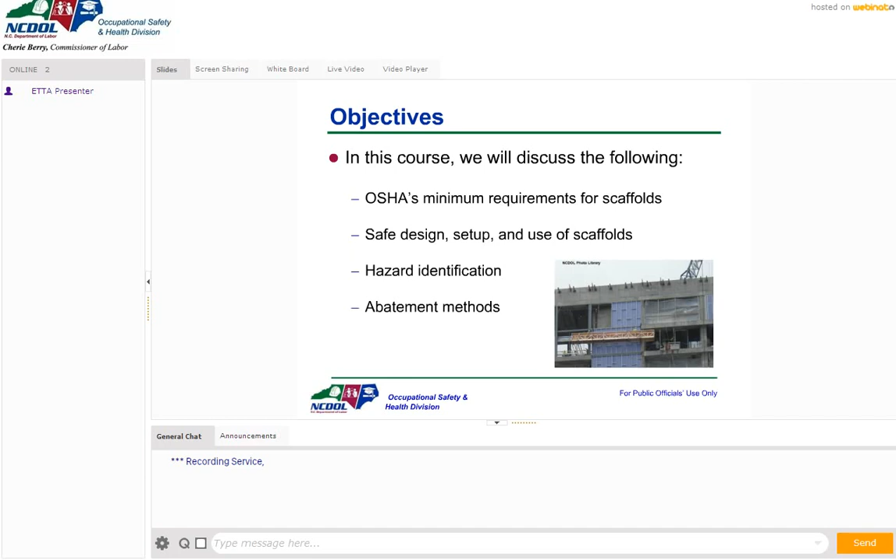But for those of you who can see that little picture in there, a little photo, what type of scaffold is that? What type of scaffold is that on the side of that building? All right, Wesley, that's a suspended scaffold. So again, we're going to be talking about it. Jim, you're all correct. Anybody that typed in suspended, you're exactly right.

Now, again, as we go through the standards, we're going to talk about the scope, general requirements and additional requirements, aerial lifts, and training requirements. And there are a lot of appendixes to scaffolds. These are all non-mandatory, but they got good information about specs, safe access and protection of erectors and dismantlers.

National standards, training topics, drawings, and like I said, all those are non-mandatory appendices. Now, what OSHA standard did scaffolds just come out of? What did scaffolds come out of? What OSHA standard? Think walking working surfaces. What standard book is that in? No, we're not talking about subpart K. What standard book? If you have a standards book, okay, those are all good answers.

If you have a book, an OSHA standards book, what standards book did the scaffolds come out of? If you got a new one. Okay, now it's still in construction. That's 1926. So scaffolds are in 1926. What's the other? Yeah, there we go, Jim. 1910, Christina, Mark. Scaffolds, if you're in general industry and you're using scaffolds, say for maintenance, if you have a scaffold set up, scaffolds used to be in the general industry standard. Now, if you're using scaffolds at all, even if you're in general industry work, you're going to be going to the construction standard.

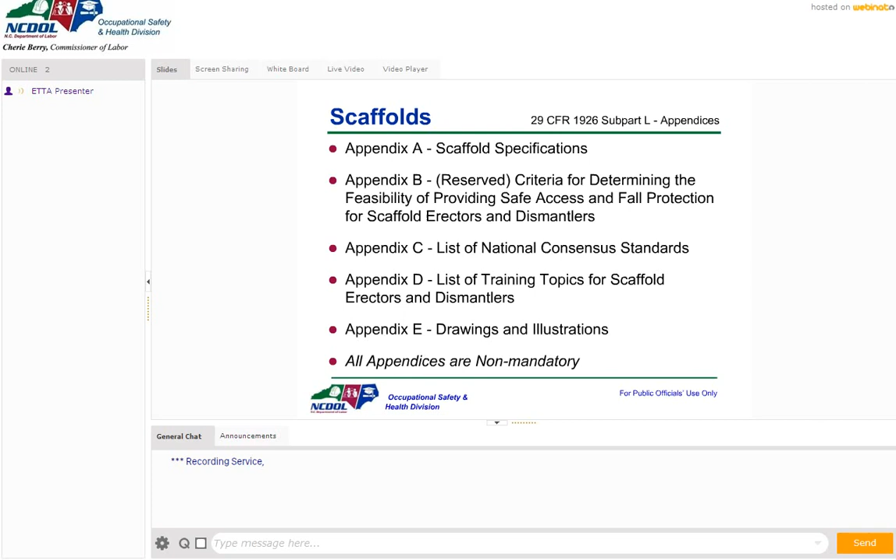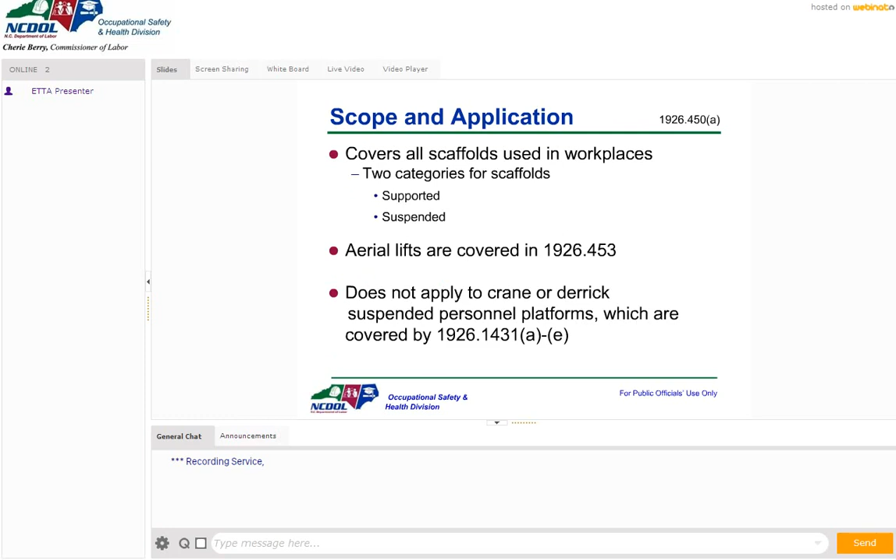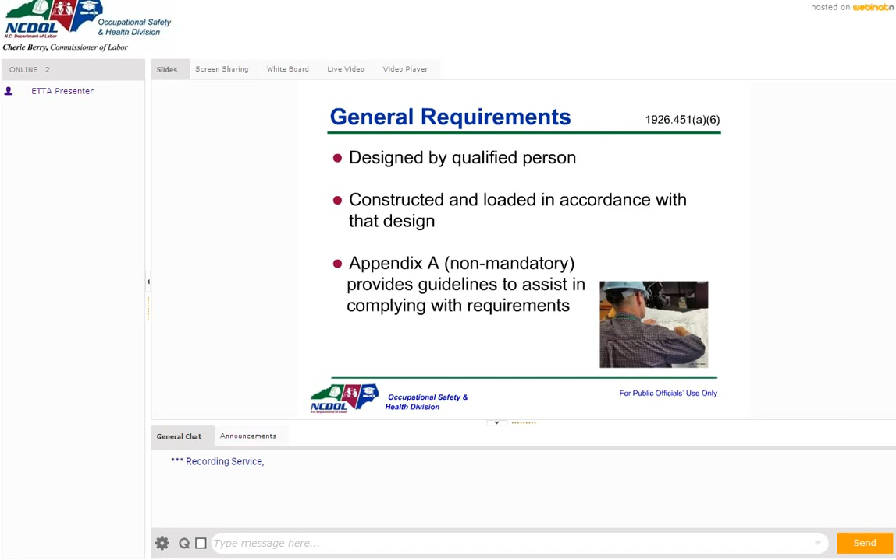Okay, let's keep going. Now we're going to cover all types of scaffolds, including supported, suspended, aerial lifts, but not crane or derrick suspended platforms covered by another standard. Now, the scaffolds need to be designed by a qualified person and loaded by the design. And then, like I said, you can look into the appendix for more information.

Now, what are the major things? If you set up this scaffold here, this is a pretty big scaffold setup. What are the major things you're looking for when you're looking at that scaffold?

So you're looking for major things. Access, okay, is there proper access? Is it anchored to the building if necessary? Is it fully planked? Is it braced?

Now, if you're measuring the scaffold, what might you be measuring? The platforms, okay, the width. The guardrails, overhang, those are all great answers. Toe boards, guardrails. But you want the scaffold to be plumb.

What does plumb mean? P-L-U-M-B, plumb. It needs to be plumb. Now plumb would be like straight up and down. So if you put a level beside it, or a device, you could use your iPhone, whatever, if it's straight up and down, what degree would the reading be? What degree is straight up and down? Straight up would be 90 degrees, or 0 on the level.

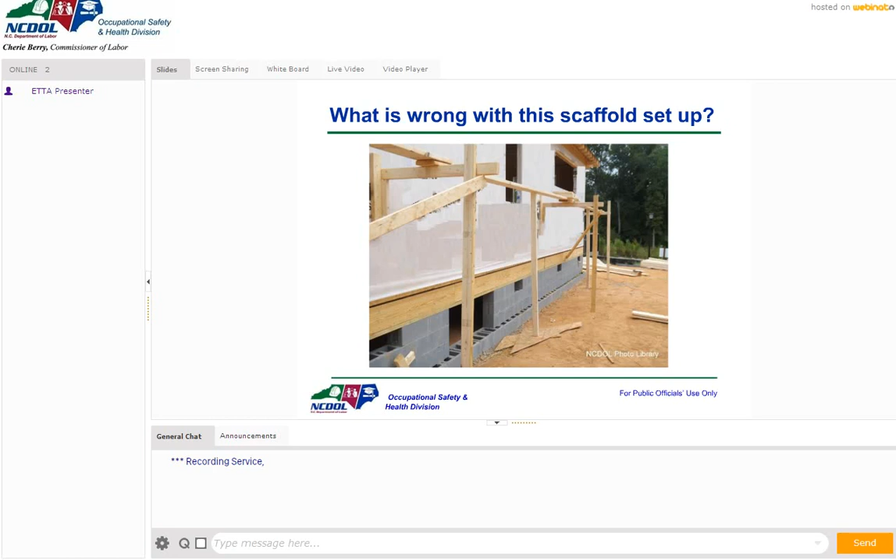Now the scaffold should be supporting at least 4 times the intended load. That's the people, equipment, and supplies.

And now we also see a compliance picture. Like I said, we get a lot of our photos from compliance. What do you see wrong with this? Now it's really hard for you to see because that picture is so small on your screen. Do you see anything wrong? Okay, guardrail, okay, yeah, a lot. That's a great answer, a lot.

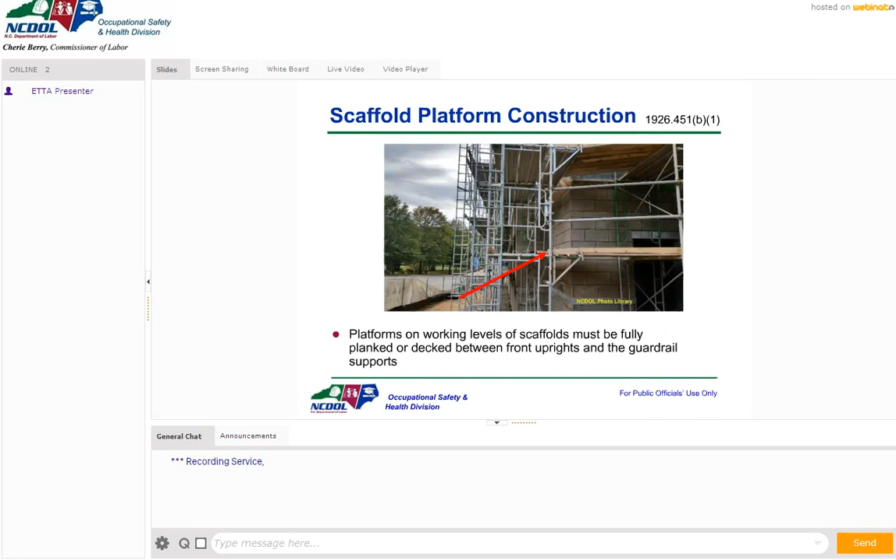So then we get to platform should be fully planked between the uprights. Okay, that's pretty well set. We had a mention here, no hard hat. That is so small, oh yeah, one of those workers may not have a hard hat on. It's really, I'd have to blow that up. But hard hats are required. That's a great comment.

Okay, now we're going to get into a lot of specification slides. Some of those specs I'm going to read to you, this is just straight out of the standard. No more than 1 inch between adjacent units, unless you're trying to fit it around an upright, which you'd have a maximum of 9.5 inches.

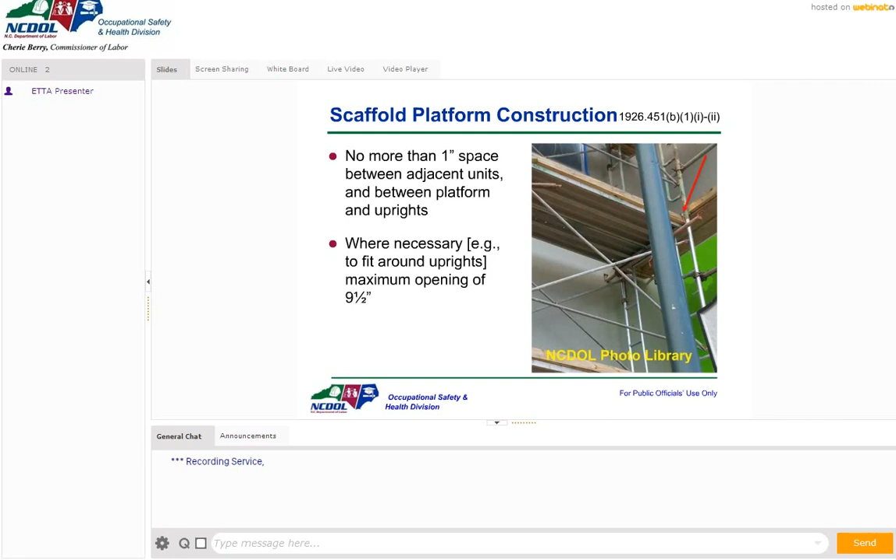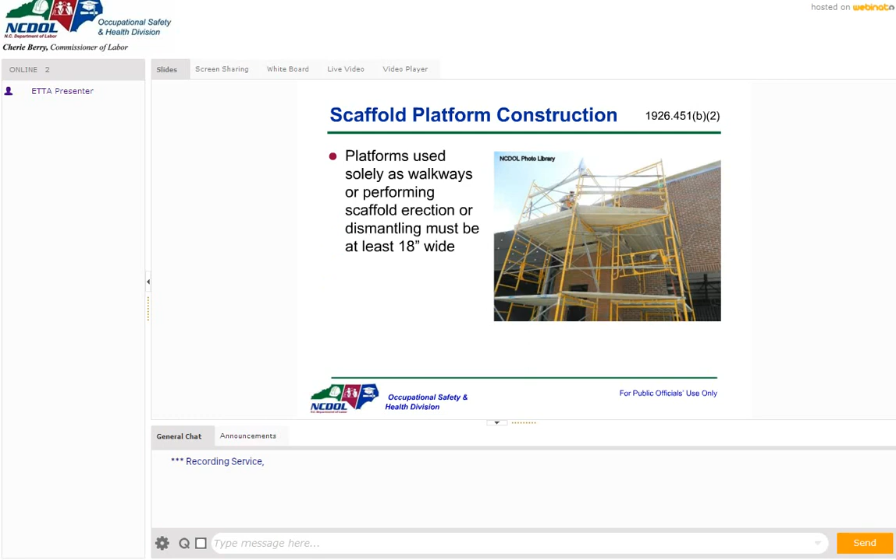Platforms for walking or performing erections should be at least 18 inches wide. And platforms for these devices or types of scaffold should be at least 12 inches wide. We got a ladder jack, top plate bracket, roof bracket, and a pump jack scaffold.

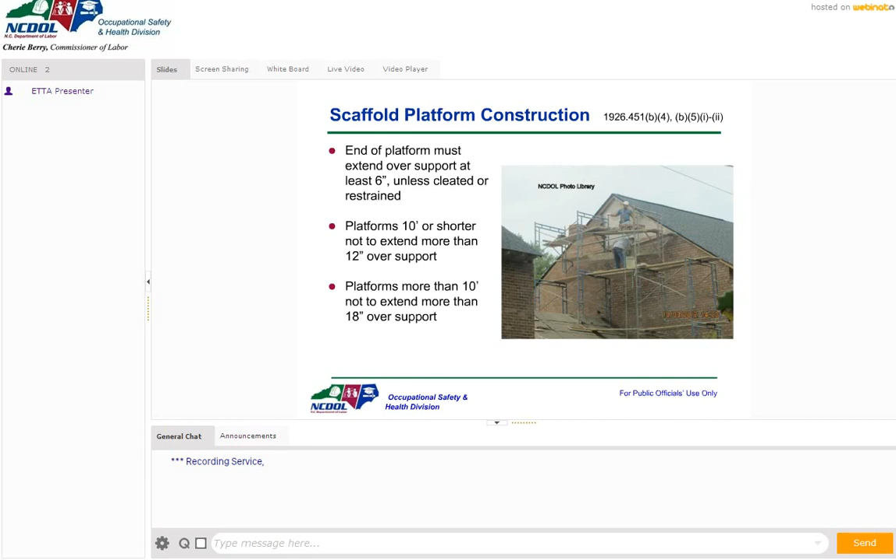This is pretty basic. So the competent person for the site has to do an inspection of that scaffold daily before use, and they're going to be looking at platforms and full planking and all. And each abutted end of a scaffold plank must be on a separate support surface.

So the end of each abutted plank must be on its own surface and not on another scaffold.

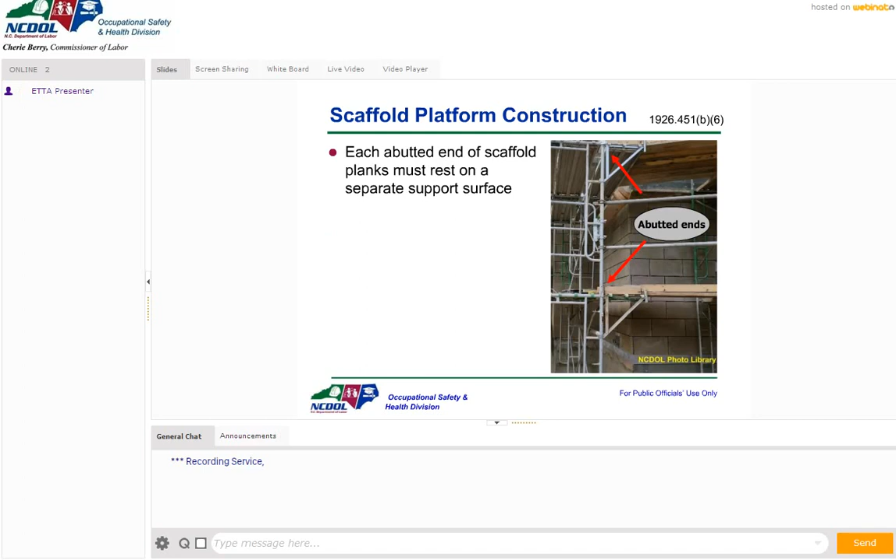A minute ago, I should have mentioned on this other side we have issues as well. So there's several. Now let me get back to where we were.

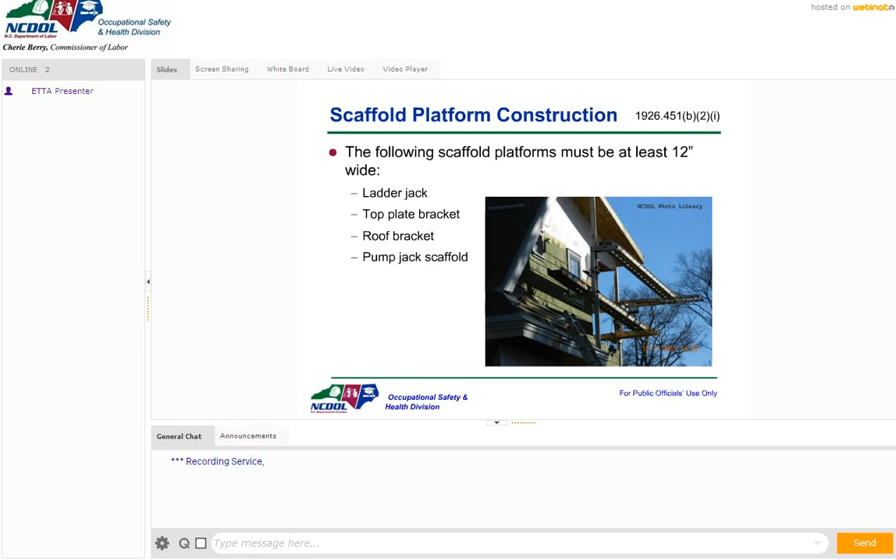Okay, let's keep going. Scaffold components must not be intermixed. Now, what about that picture shows you that those are intermixed components? How can you tell from that picture? Different colors, that's right, colors. So I don't think anybody just decided to take a particular scaffold and take the parts apart and start painting them different colors. These are parts from different scaffolds.

Now, what is that worker doing wrong there? Did we see this all the time? What is the worker doing? He's doing something - climbing the cross brace. Climbing the cross braces are not engineered for that, and that's a serious issue when you see people climbing the cross brace.

Your competent person, when setting up a scaffold, needs to be involved and fully knowledgeable of the proper setup for that scaffold. They're looking at the situation, the weather, everything. If a scaffold is in use, let's say the competent person is on the ground for the job, looking up and seeing this guy climbing. What should the competent person do?

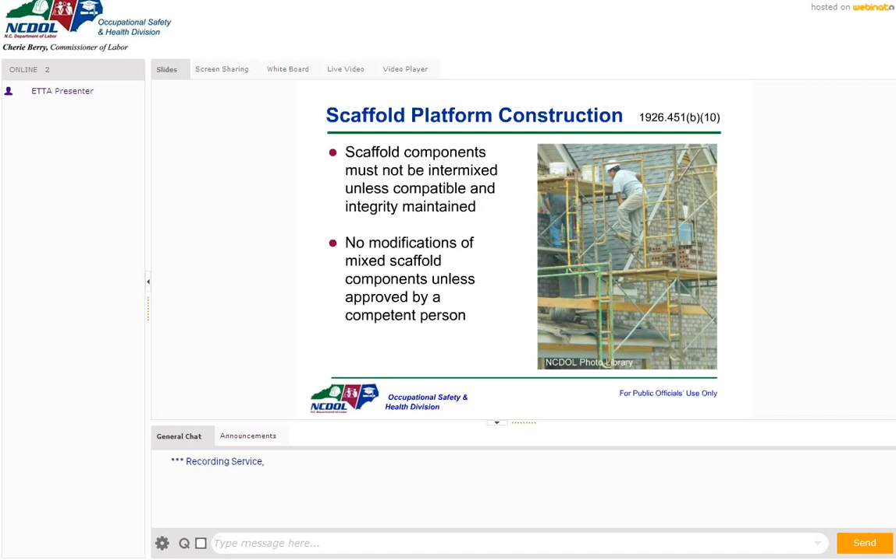If we build these scaffolds taller and taller, we have to start essentially tying them off to the structure—guying, tying, bracing, or equivalent. It says 4-to-1. So what is that? You're saying 4 times something to determine where you need that first tie off. So if the base of the scaffold is, let's say, 5 feet by 8 feet...

What would the tie-off point be? What height? Let's say 8 by 5 at the bottom. Still not seeing the answer—it's 4 times the minimum dimension of the base. 20 feet, Michael, that's right. 20 feet is your first tie off. Your base of your scaffold is 5 feet by 8 feet, so 5 feet is the smaller dimension. 4 times 5 is 20.

So if a compliance officer or an inspector came in, they would say you have to have a tie off at 20 feet. Federal OSHA has a quick card on supported scaffold inspection tips that talks about tie-offs. You can go to Federal OSHA and print out a handout on that as well. Okay, let's go to the next slide.

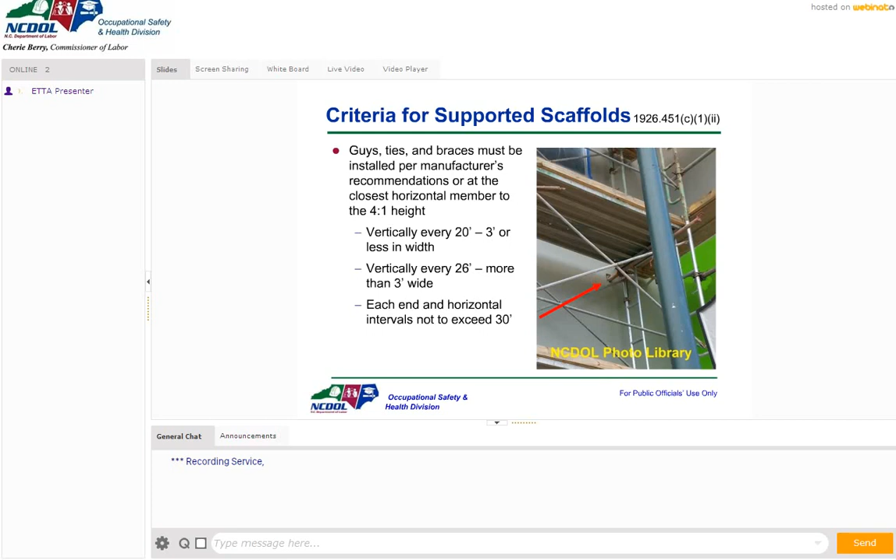We must install everything by manufacturer specs, and I am not going to read that slide to you. There's a connection here, as you can see. Poles, legs, frames, uprights must bear on base plates and mud sills to give a firm foundation. And the second bullet says, if you're on a concrete slab, you don't need a mud sill.

Now, what is a mud sill? You can look at the picture and see a mud sill. What is a mud sill? I know somebody on here knows—we got some experts online. What is a mud sill?

That support base, okay. There are pieces of wood under the base plate of the scaffold, the base plate. That base plate needs to be on a mud sill. Now that could be a section of a board like those, or it could be a long board, but it's a mud sill to keep, like Jim says, the whole scaffold from sinking into the ground. Now, if you're on concrete, that's not going to happen, so your base plate can be just right there on top of the concrete.

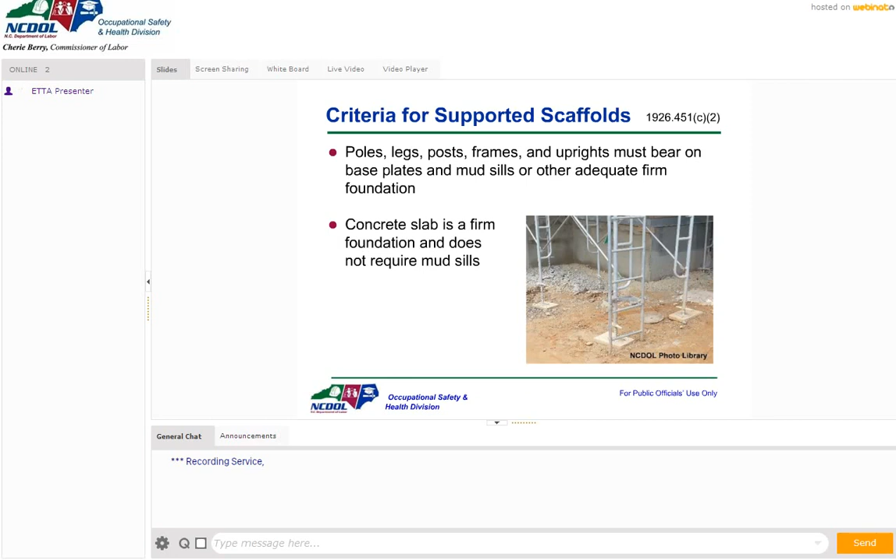Here's a really good close-up showing the mud sill. So right here, you've got the mud sill, and you got the base plate here, and a screw jack here to help level the scaffold, and here's an access ladder going up. So this is what we expect to see.

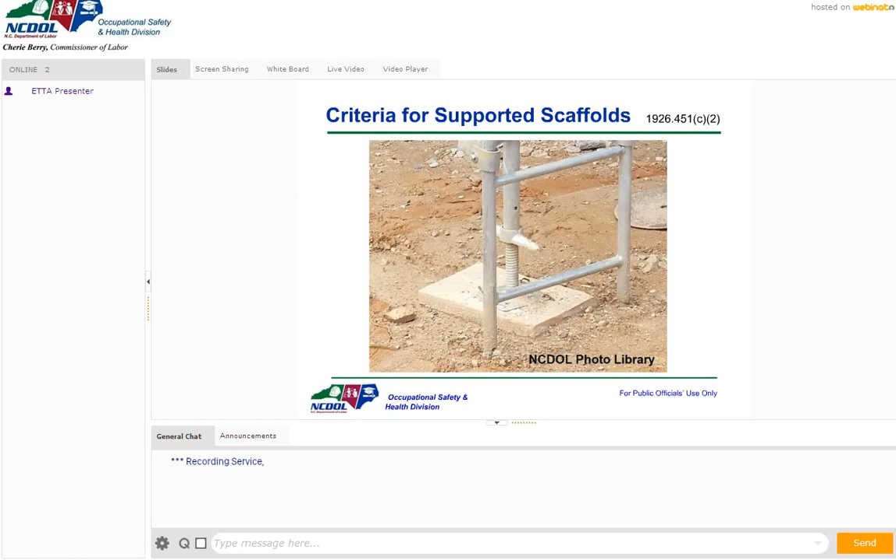Now we also see stuff like this—unstable objects. We've got a real problem here. Can you put a base plate on top of a concrete or cinder block? I'll say not concrete, but cinder block. Can you do that? No, you cannot use a concrete block to put a base plate or scaffold on. No way, like Wesley said.

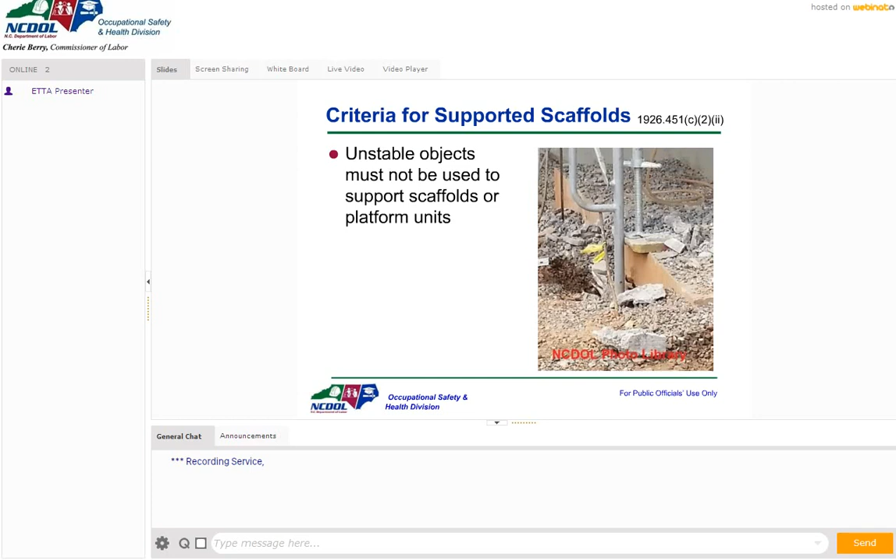Okay, now we're back to that picture. If a compliance officer, OSHA compliance officer comes in, or an insurance company inspector comes in, or a corporate safety auditor comes in, and they see that, what do you think? Now this picture, what do I not see? What do I not see in this picture?

Right, and a lot of other stuff is wrong as well. But a compliance officer has to prove exposure to an employee, that somebody was up there standing on that. They can tell by interviewing employees, and there are different things they can look at to show that somebody was actually up there. They may even ask, how was that even built?

So I wouldn't want to work for a company that does this kind of stuff. That would be really scary to me to know that there are employers out there that are setting up this sort of thing.

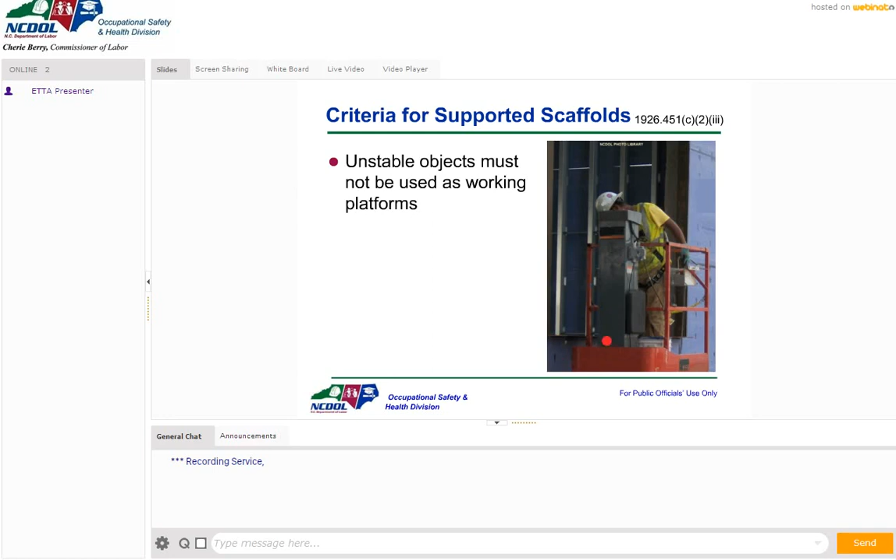Now, unstable objects can't be used as working platforms. So what is that person standing on? You might not be able to tell. Okay, that's a bucket. So you can't take these elevated work platforms and put boxes and buckets and other things up there to give you more height, or ladders. You don't want to put any of that stuff, whether it's stable or not, because when you raise somebody up too high, the guardrails can't even do their job.

Front end loaders must not be used to support platforms unless designed by the manufacturer. If you have a scaffold platform, it has to be properly engineered and designed and attached to the forks. If you have rough terrain forklifts with those platforms, it has to be properly installed.

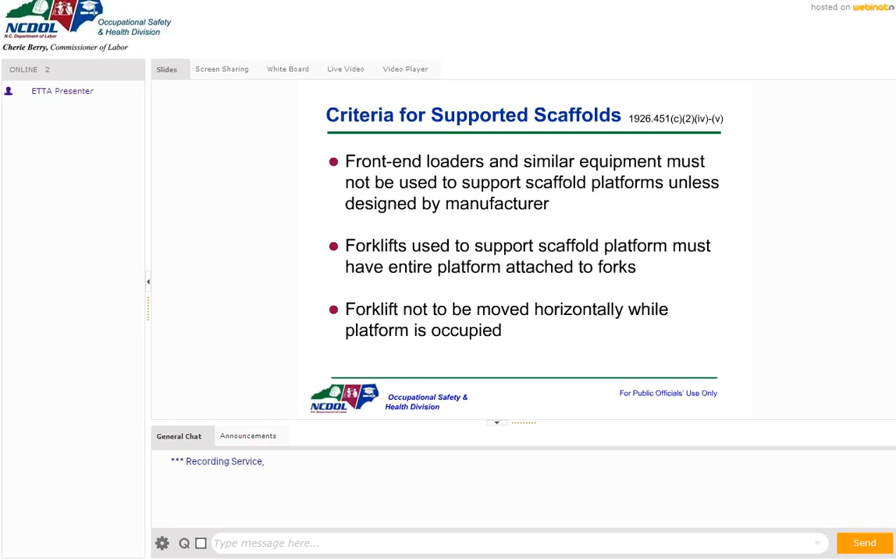So here we go, plumbing and bracing is important. Now here we have suspension scaffolds. If you're working on that suspension scaffold, one of those people up there, do they need fall protection? Do they need a personal fall arrest system? Yes, they do. So you're going to have lifelines. Not just the lines or cables that are suspending the actual scaffold, but lifelines coming down for the workers to attach to, because we see in the news all the time where the wind gets involved with these things, or they have failures, and next thing you know you have a worker dangling by their lifeline, which actually saves their life.

Now, if you follow the news this week, there were two fatalities at Disney World. They're building a hotel down there. They had a supported scaffold. From what I heard on the news, the supported scaffold came down, and I guess they're still investigating it, but two people died. So again, these types of falls are not uncommon anywhere in the United States.

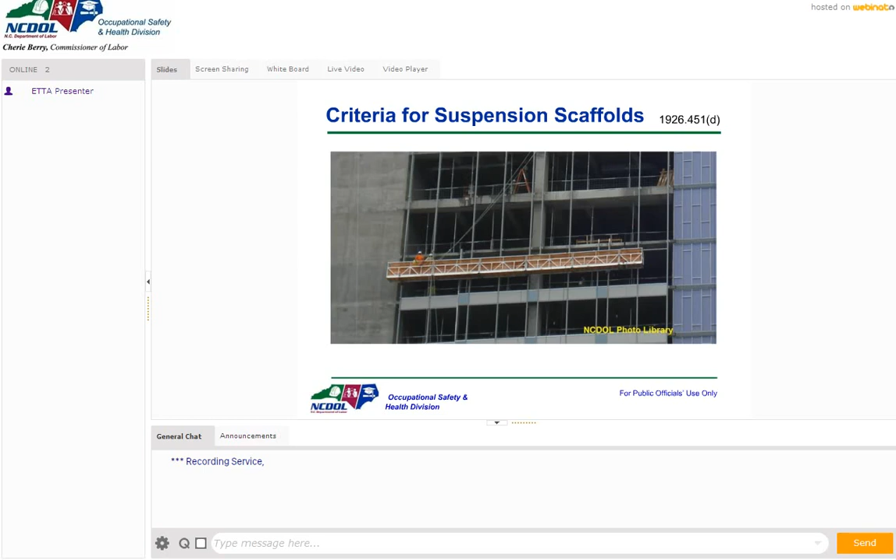Okay, so suspension scaffold support devices must be properly installed and supported. Like I said, there's a lot of engineering involved. Here's the lifeline I'm talking about for this worker that's wearing his personal fall arrest system.

Use proper counterweights. Now, your major companies in the construction business seldom, in my opinion, are you going to see them take a suspended scaffold and just rig it up with stuff that's not approved as part of that system. They're going to assemble and disassemble it properly. So most of the time you're not going to see them using parts that don't go with it, or using other counterweights. Probably not going to see it.

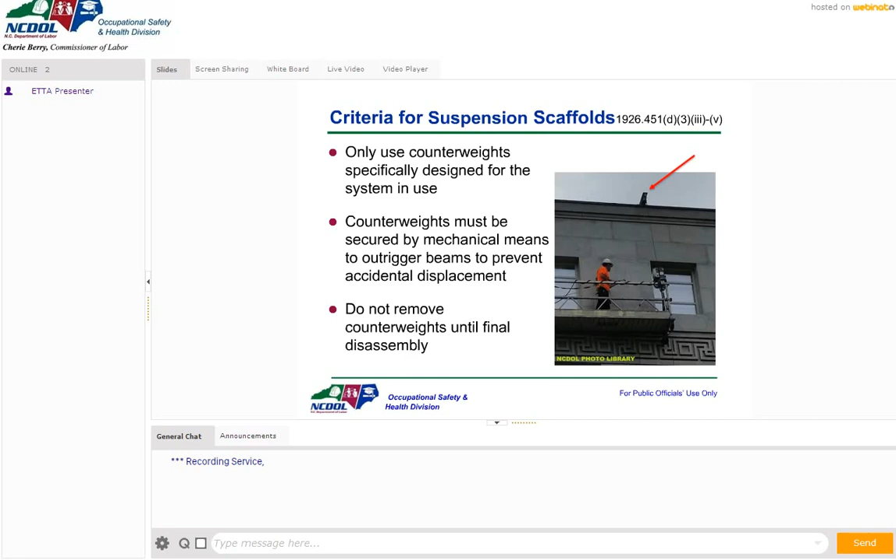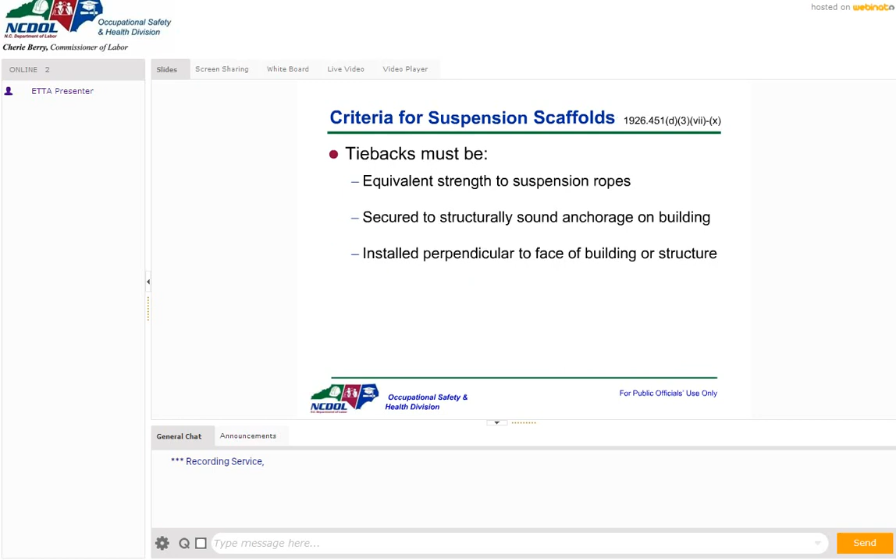Tiebacks, properly engineered and secured and then properly installed. Like I said, I'm not going to read you a bunch of specifications today. But when you have scaffolds set up, the question you're going to ask is, how does somebody get up there?

So you've got ladders that are portable, hook-on, stair towers, attachable stairway type ladders, and prefab scaffold access ladders. Now, there's a big difference between the scaffold frame and the scaffold ladder. So you don't want employees climbing the frame or climbing the cross braces. You want them climbing an actual ladder.

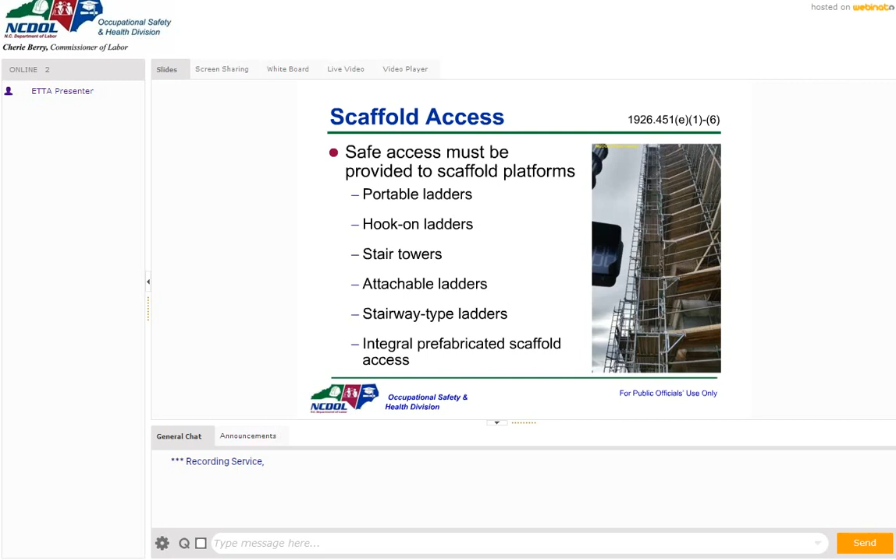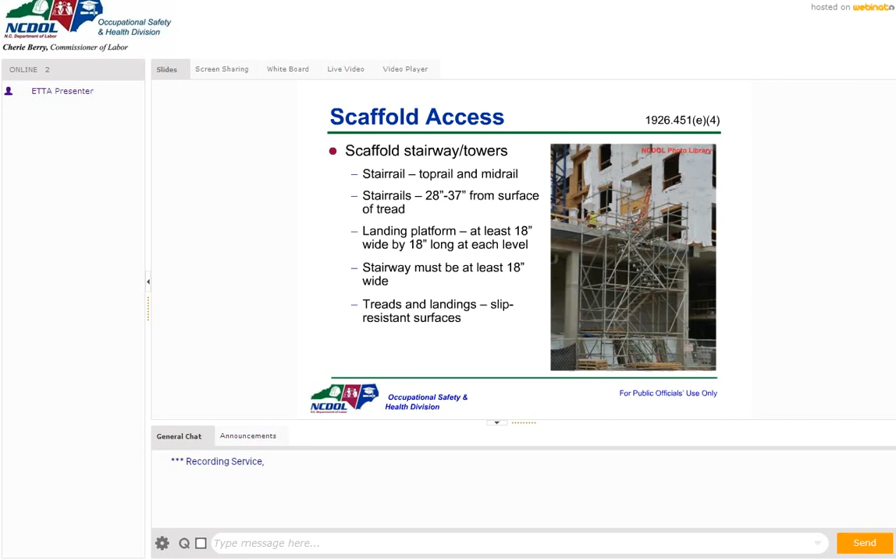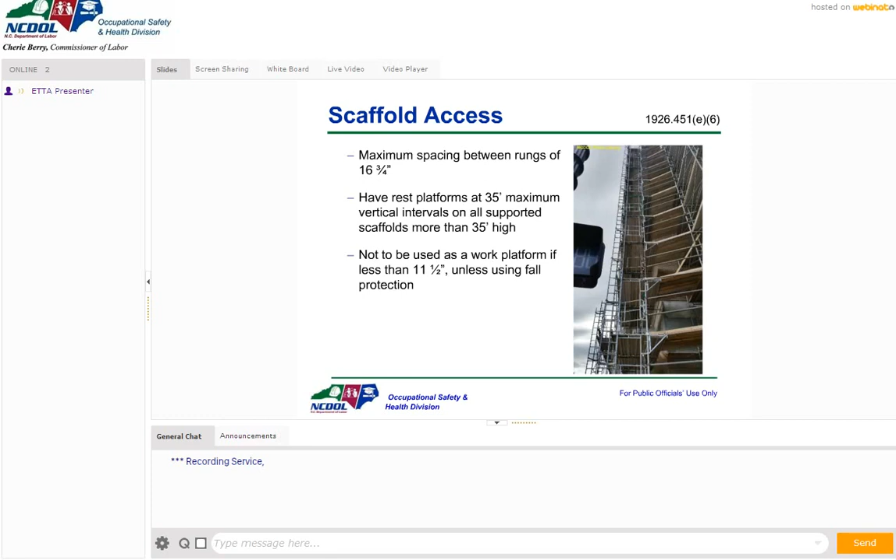Integral access using access frames. If you have built-in ladders or whatever, they need to be built to specification. If you want to read specifications, you can go to the OSHA standard and see what all these specs are. If they're properly installed, you're going to meet all these numbers.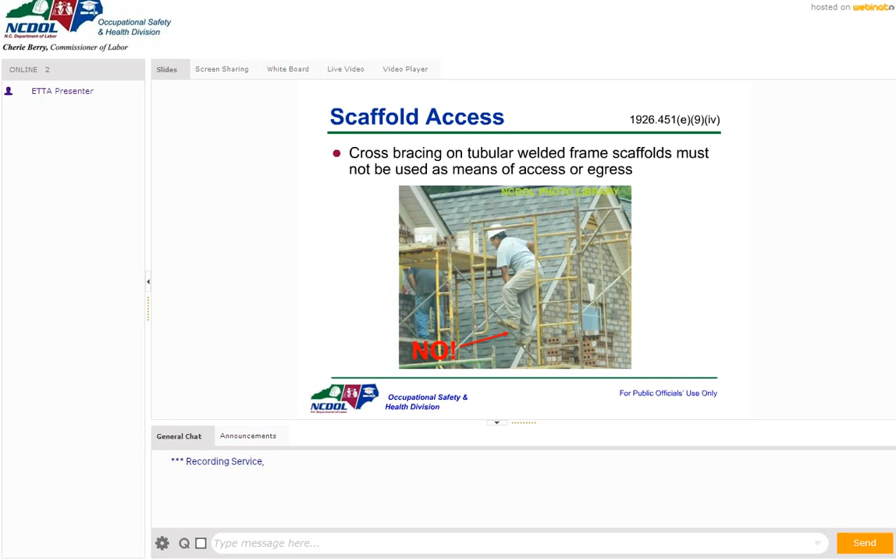So with your company, you're going to tag out scaffolds, ladders, any equipment that doesn't pass inspection. You're going to put a do-not-use tag on it. In many cases, that's going to be a red tag. You're going to tag it out.

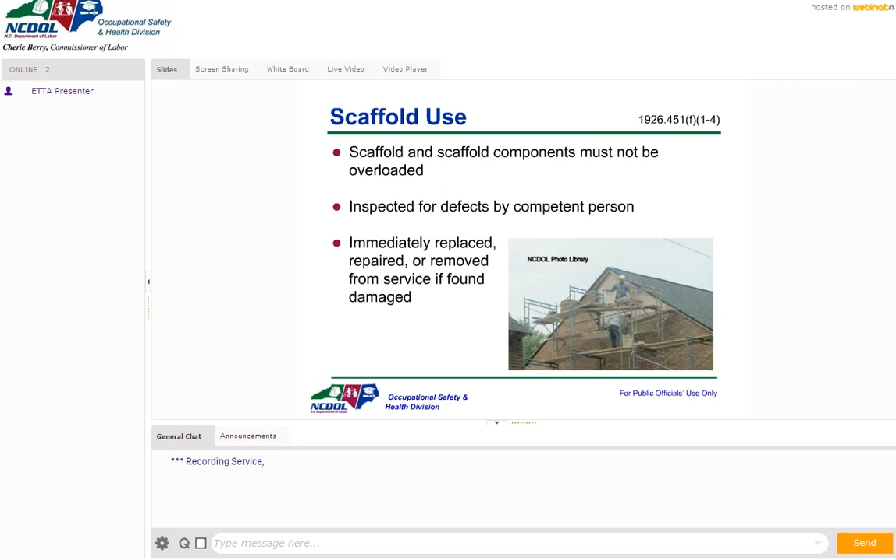Okay, Wesley, that's enough. Let's go ahead and look at Wesley's comment. We were going to get to that, but that's fine, we'll go ahead and talk about it. Power lines.

High voltage lines, generally speaking, how far should you be away from them? At least how far? 10 feet. And then depending on the voltage, you do have to keep increasing your distance. I believe that is a slide that we're going to see later. But I appreciate it. Anytime you're using anything tall that you're building, always look around for power lines.

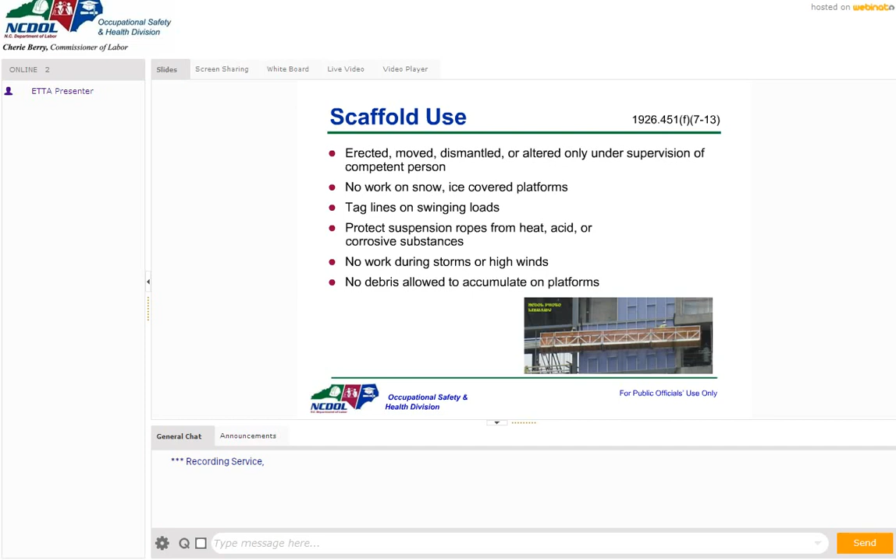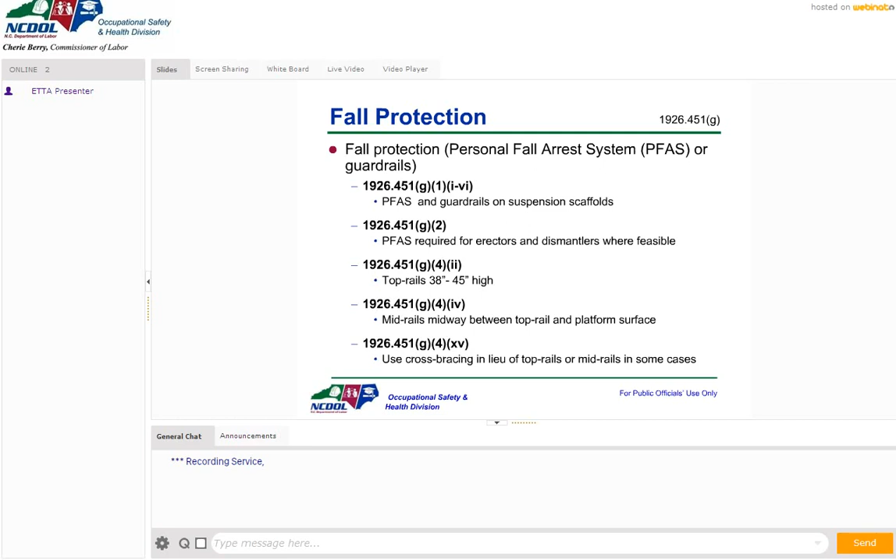Fall protection. So some of these scaffolds that you use are not only going to be properly erected, but some of them you have to have a personal fall arrest system on them as well. Like a suspended scaffold, you've got a fall arrest system. So if you've got a supported scaffold with guardrails, you don't need it. It just depends on the type of scaffold that we're using.

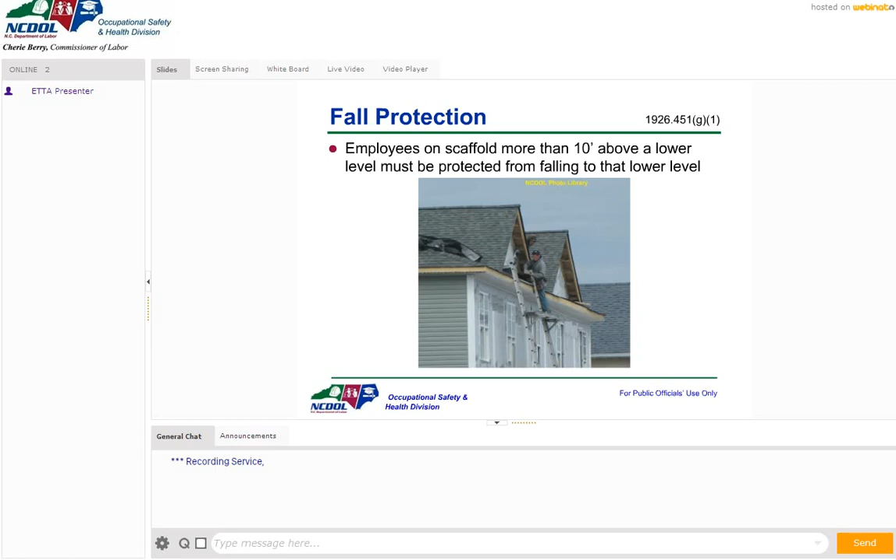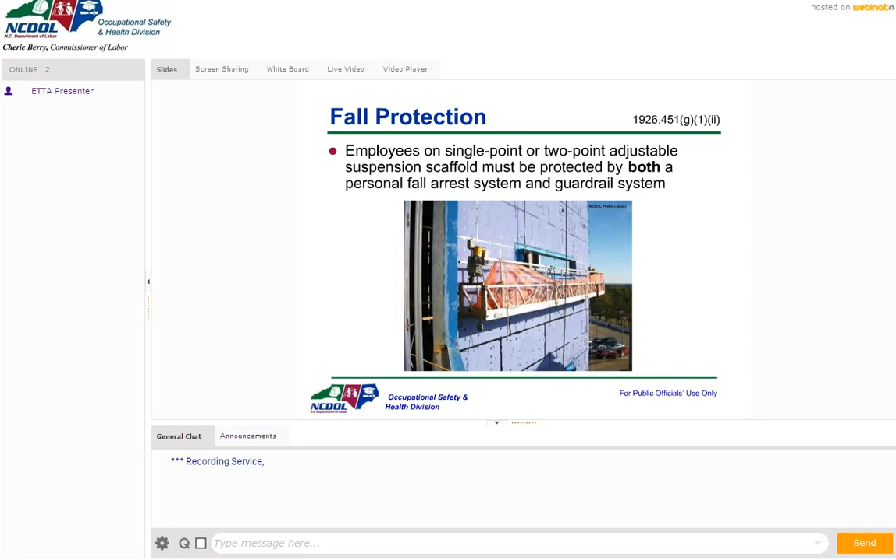The person on the suspended scaffold needs a personal fall arrest system, a lifeline, a personal fall arrest system. That's all that slide says.

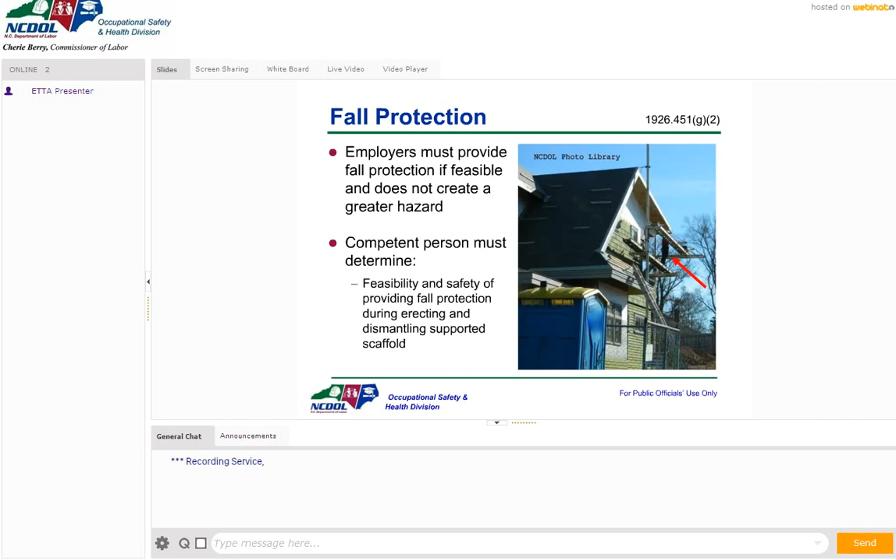This talks about guardrail systems. You can read those comments if you'd like, but guardrails must be compliant. Cross bracing can be used sometimes as guardrails, as long as the bracing falls within those ranges for the top and mid rail.

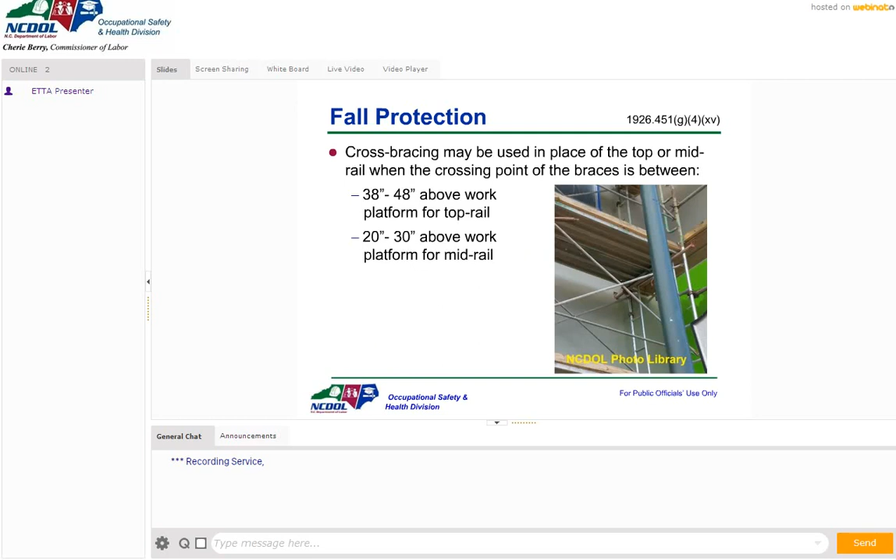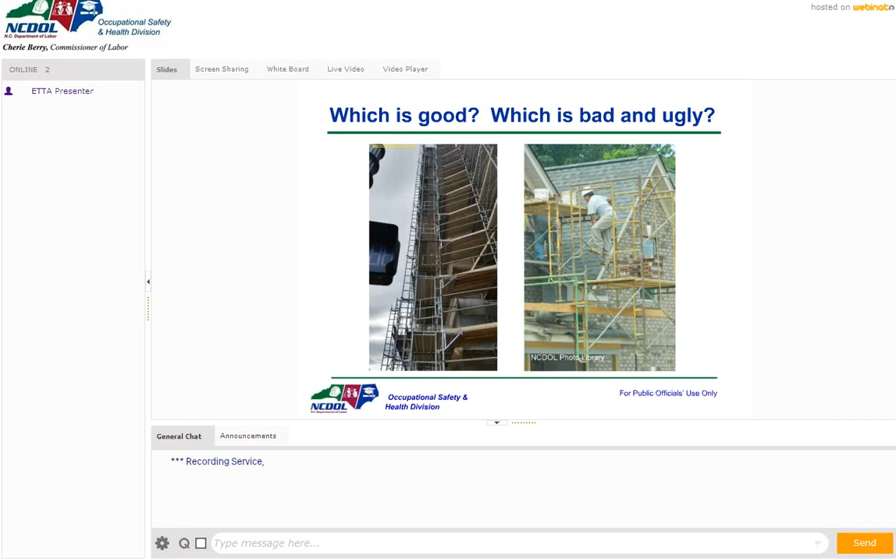Hard hats are required for employees on scaffolds, no matter what. Sometimes in the OSHA standards you'll see those referred to as hard hats, or sometimes referred to as protective helmets. Whether it's called a protective helmet or hard hat, they are required on scaffolds.

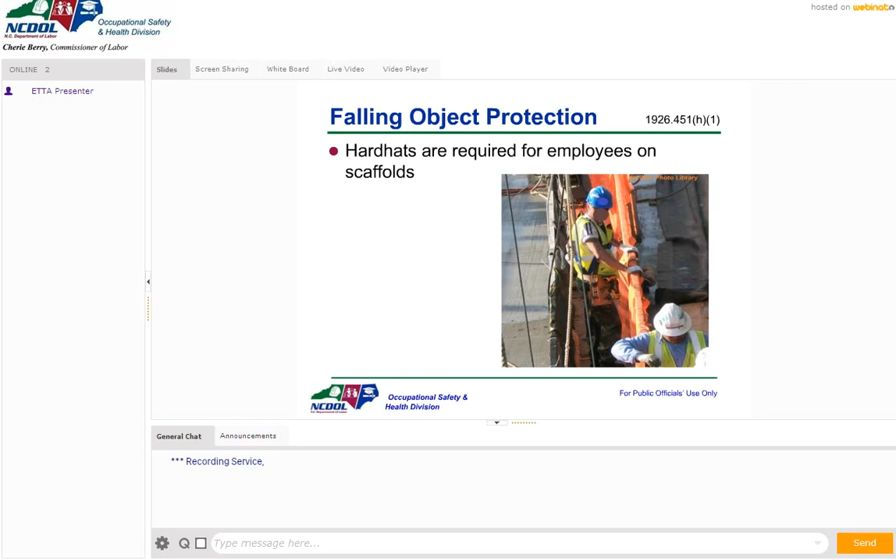If you erect toe boards on your scaffolds and you have stuff that's higher that can get kicked off above your toe boards, you have to have something on the sides of your setup to prevent things from coming off, or put netting under there as a containment net. Now, if you have a construction site where you don't have catch nets and you have things that can fall way outside the work zone, you need to establish a work zone or hazard area for somebody not even to be able to enter. You've got to think about what could actually fall from this scaffold.

Now let's go ahead and ask this question. If you had a hard hat on, is that always all you need? Is a hard hat going to protect you from anything that can fall from the scaffold? No. And if you go onto YouTube, you can see videos where people take hard hats and drop objects from height to show how protected those hard hats are.

They're a good idea, but if I had a hard hat on and an entire cube of bricks came down, I don't think I'm going to survive that if all that fell on me at once.

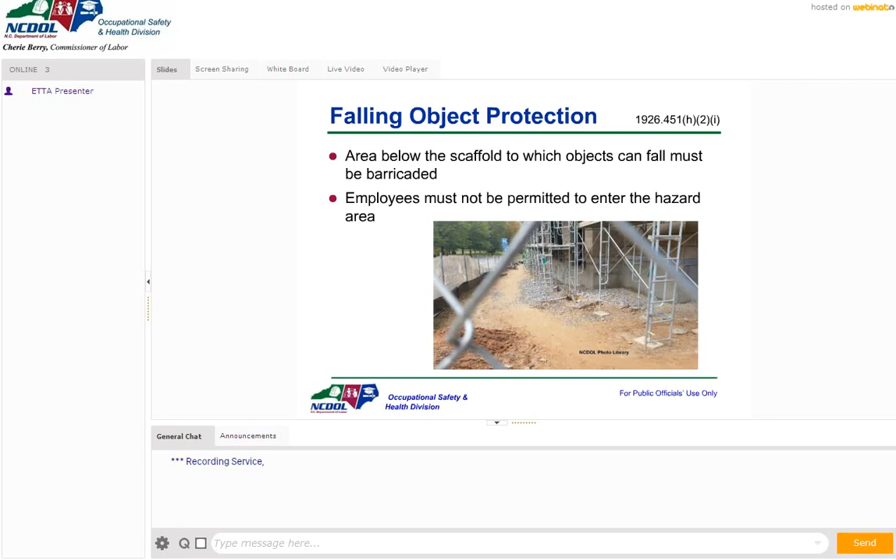Now, like I said a minute ago, if you've got materials piled high, you might want to put paneling or screening from the toe board to the top of the guardrail to keep stuff from coming off of there. Yeah Wesley, a brick will always win that battle. That's true.

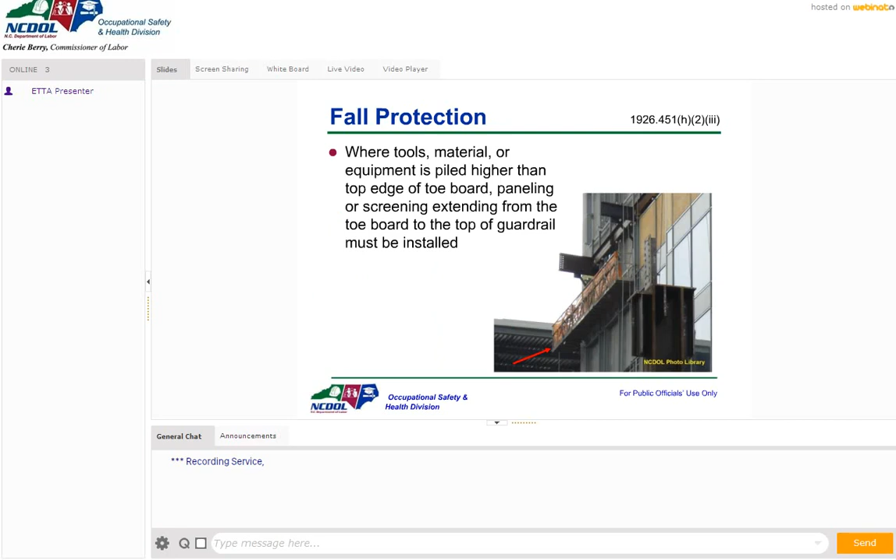Toe boards are standard 3.5-inch height, which, like I said, a board that's a 4-inch board is technically 3.5 inches, securely fastened. I think we all know that.

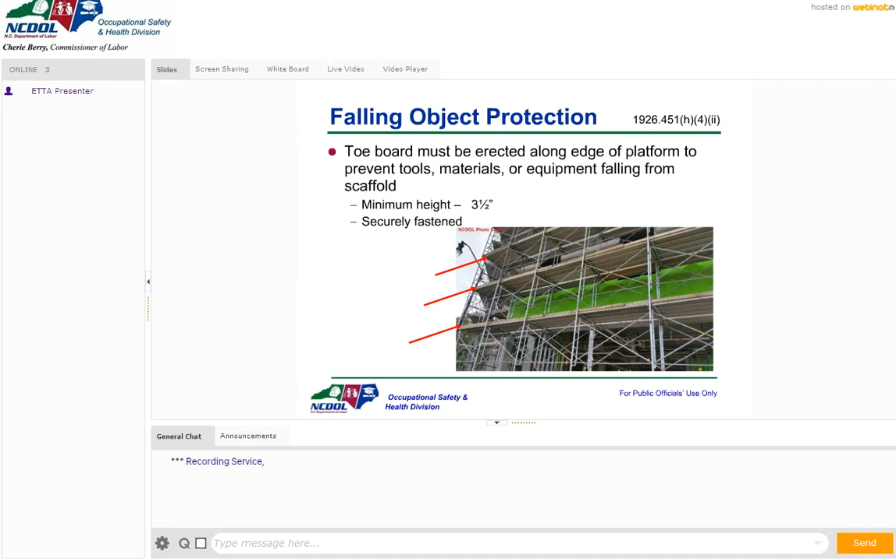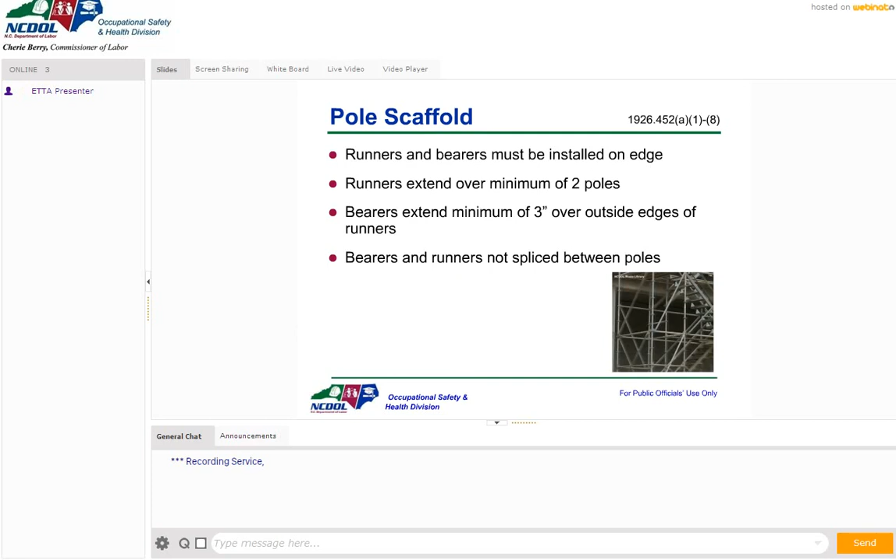Pole scaffold - here are some specifications on pole scaffolds. I'm not going to read all that to you. Like I said, if you're setting up something, you can go to the OSHA standards and your instructions to make sure everything's set up properly.

Now, if you've got a pole scaffold over 60 feet in height, that must be designed by a registered professional engineer. So when you get out of the normal design specifications of some of these scaffolds, you need to get a professional engineer to sign off on it, a PE.

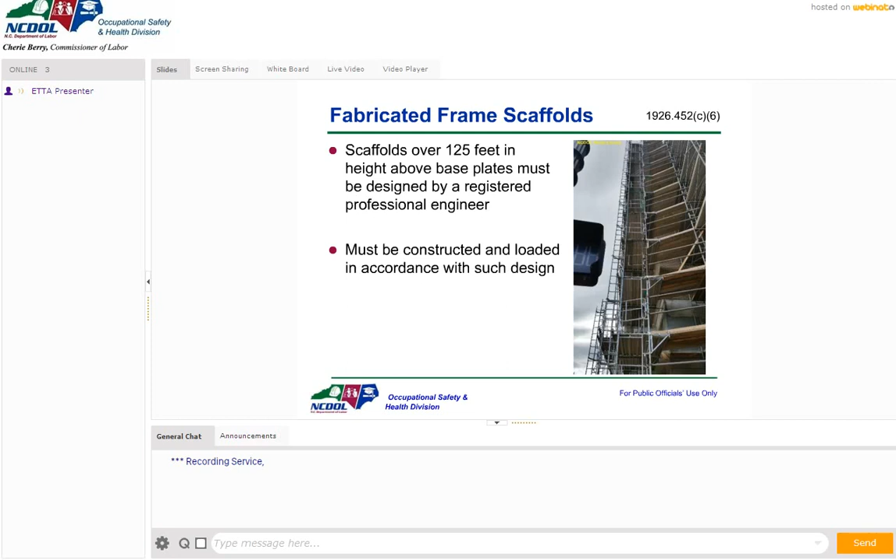Tube and coupler scaffolds, if they're over 125 feet in height, again you've got to get a professional engineer involved. Again, fabricated frame, 125 feet or more, get your professional engineer involved - they've got to sign off on that.

Unfortunately, we don't have pictures in our presentation of all the scaffolds listed here. So I'm going to turn my camera on for just a second and hold up some drawings of some scaffolds, and you're going to see the presenter. Just don't pay any attention to him - let's just look at the drawings. We don't want to see him, but let me go ahead and put some of these up for you to see. So let's go ahead and turn the camera on. And here I am.

So we've got a single point adjustable scaffold - single point adjustable scaffold right here. We've got a 2-point swing stage scaffold, 2-point swing stage scaffold.

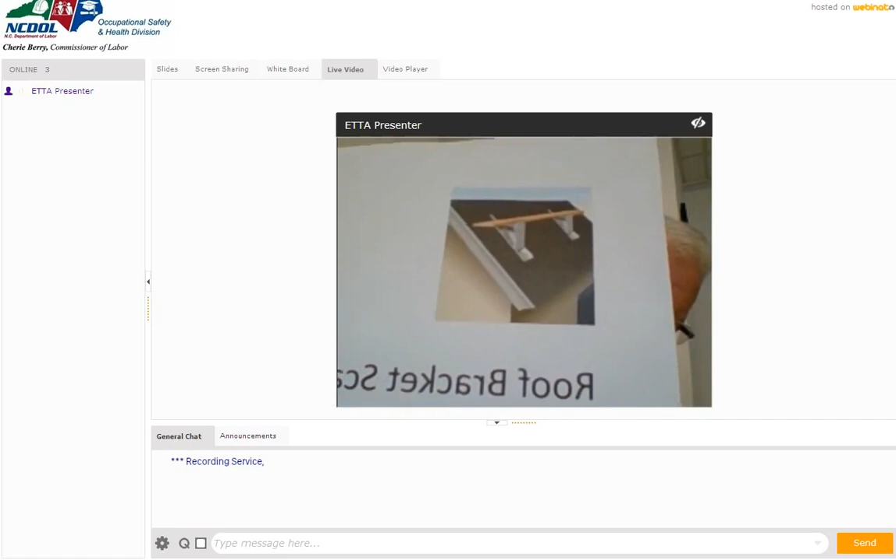We've got a bricklayer square scaffold. We've got a horse scaffold. Here's a horse scaffold. A roof bracket scaffold. Roof bracket scaffold. And here's our pump jack.

Now here's a pump jack scaffold, but you see that it's got fall protection on the ends. That's the way all of them should look, unless you have your worker in a personal fall arrest system, then that's what it should look like.

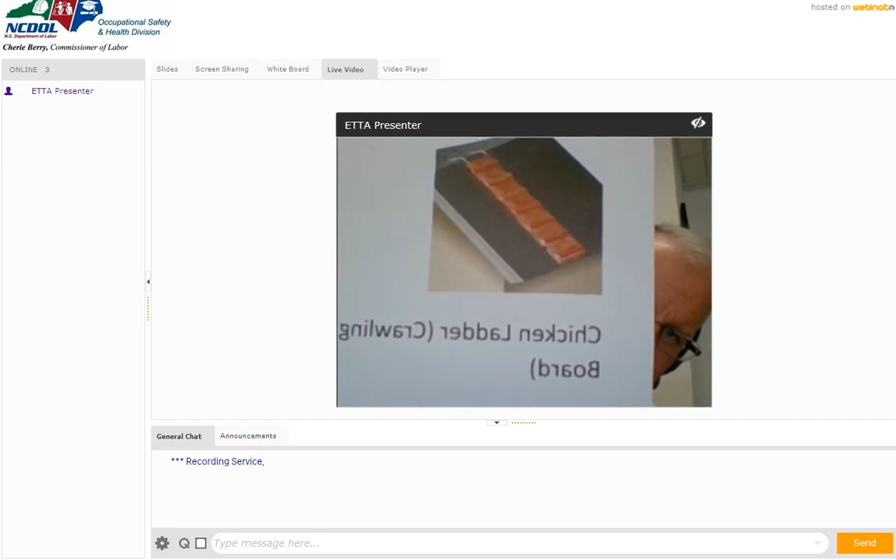Now let me go ahead, I've got some more. This is a window jack scaffold. Like I said, a person could train on this topic for a month because there's so much there. Then we have a crawling board or a chicken ladder. That's covered by the standard. That's called a chicken ladder or a crawling board.

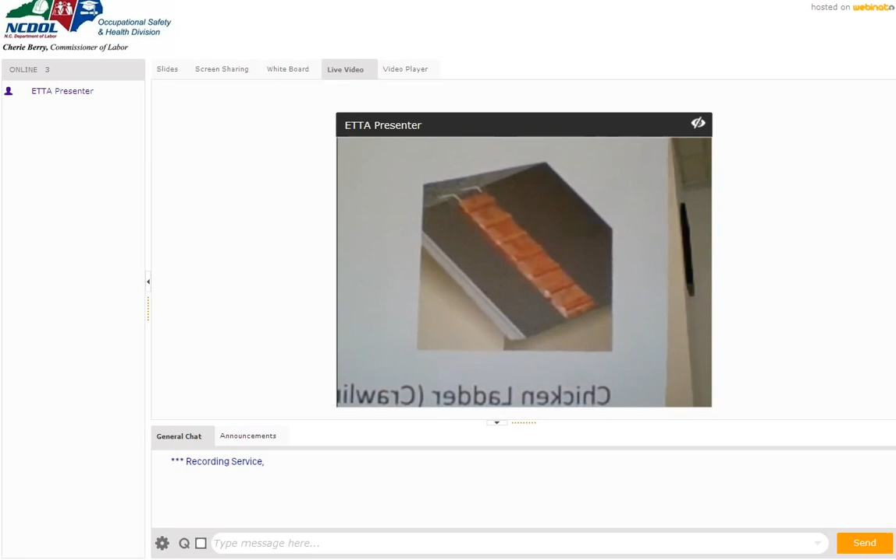Now you might see a roofer use one of these, and they'd still have to use fall protection. Now what do you see people using instead of this? What do you see them use? Okay, rope's a good answer, not what I'm looking for. I'm telling something that's not proper.

Foam's a good idea, not what I'm looking for. Cushion. What's long that has things that go - yeah, regular ladder, Candace, that's right. Or just a 2x4 across the roof. So this, but somebody will try to simulate a chicken ladder by taking a regular ladder and laying it on the roof.

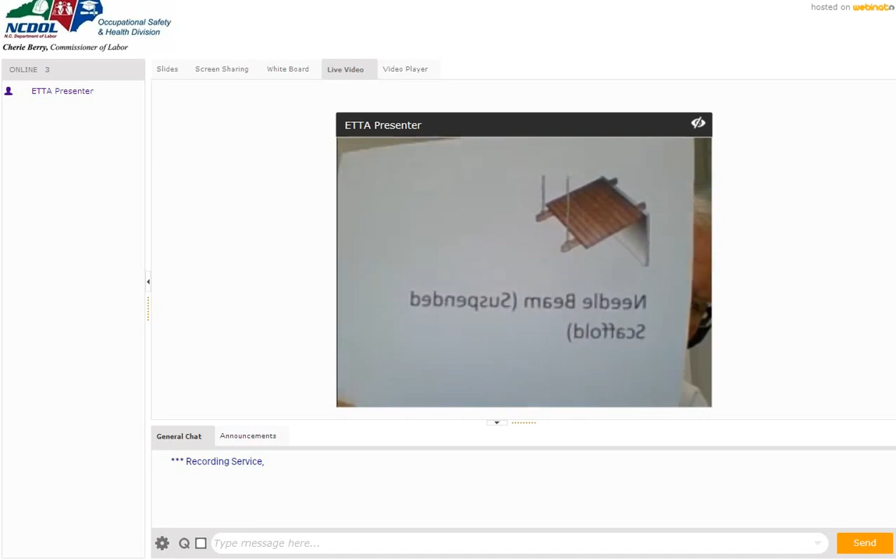Now here's a trestle ladder scaffold. We've got a needle beam suspended scaffold. We have a float or a ship scaffold. Float or ship. A catenary scaffold.

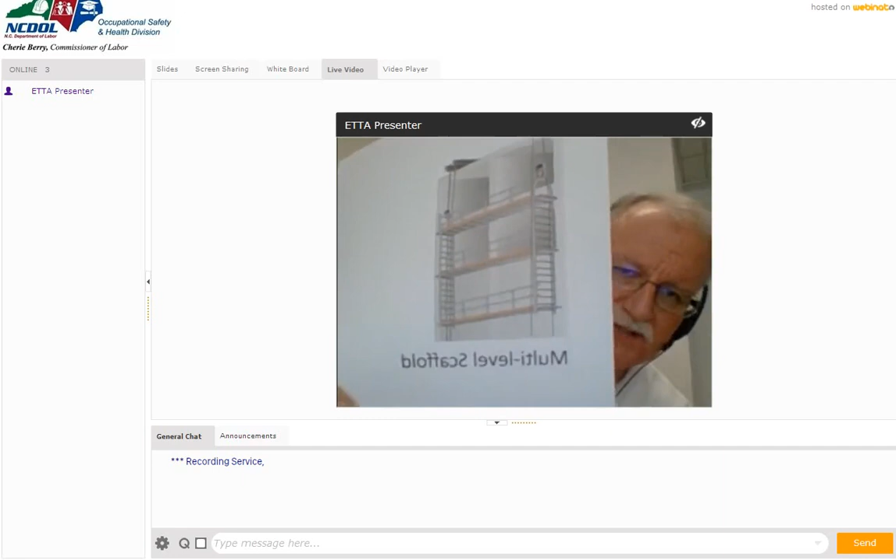We have an interior hung scaffold. We even have a multi-level scaffold. A form scaffold. And an outrigger scaffold.

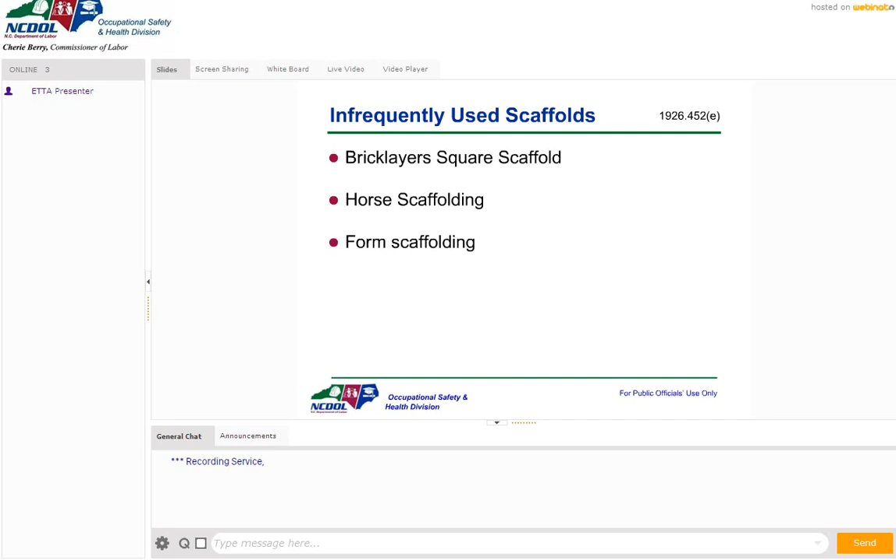And I think I've shown you a bunch of drawings here, so that'll give you a little bit more of an idea of what these look like. Of course, you in construction, you've already seen a lot of this. Let's go ahead and go back to the slides and get this guy off of here. Let's go to the slides. So when we see these words on this slide, at least you'll have an idea, if you've never seen these, what they actually look like.

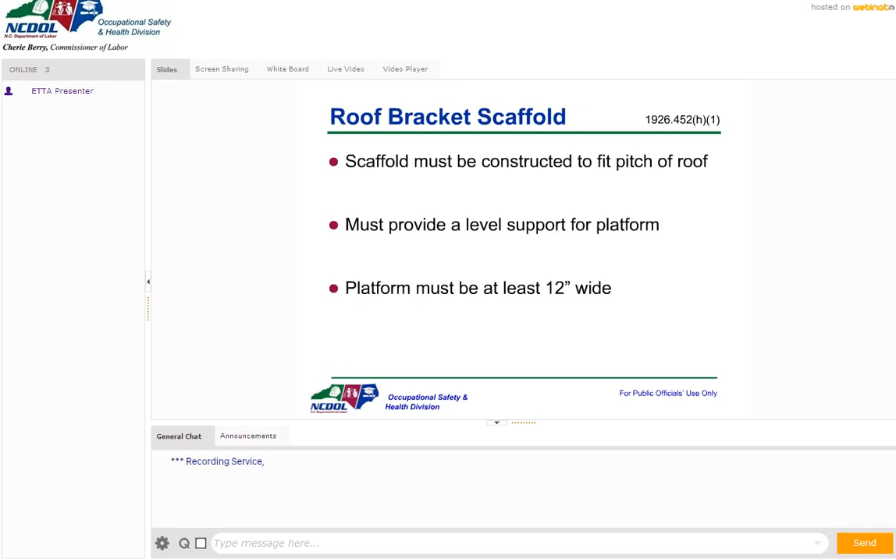Workbenches can't be used as a scaffold platform. Is there safe access to this scaffold? Do you think there's safe access to this scaffold? No, there's not safe access.

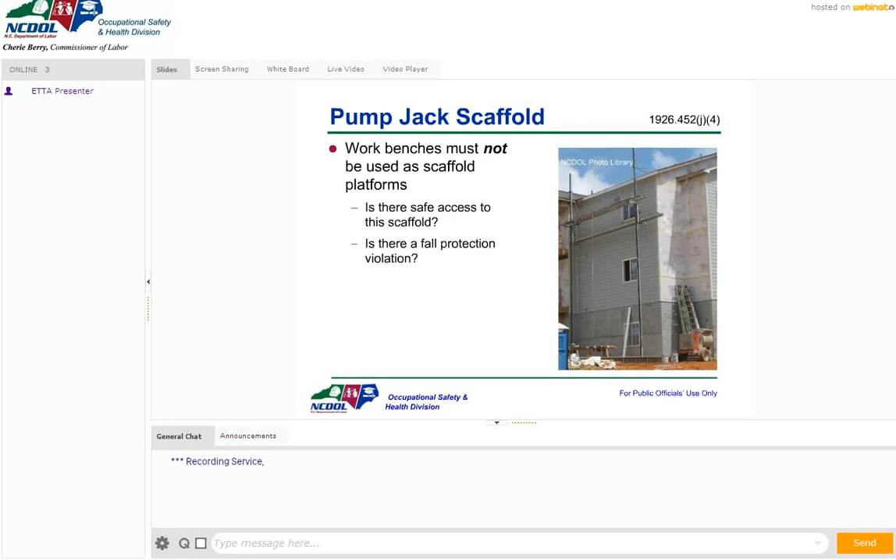And like I said, we've got lots of issues here: safe access and fall protection. Wood poles properly constructed. Now this again, this is that terrible picture. This is a train wreck. We've got two setups, one on each side of the building, and they're sharing components.

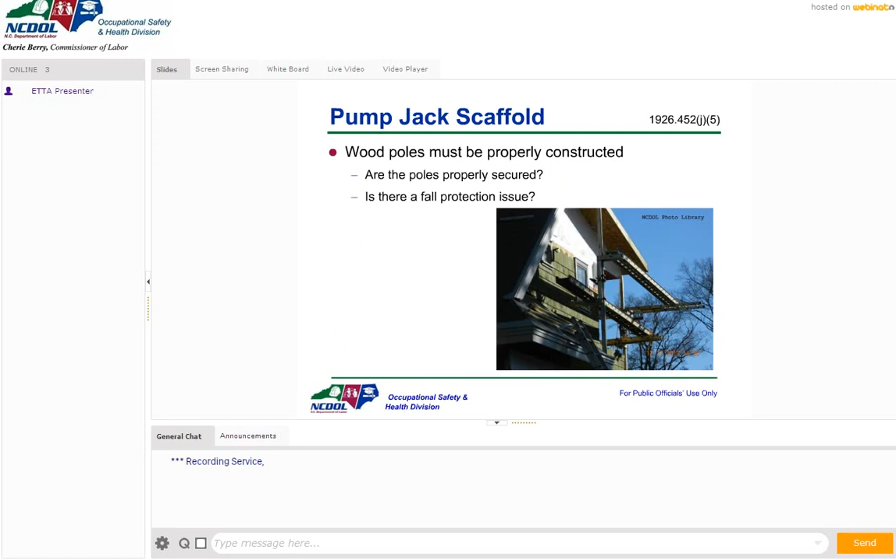Again, we got a train wreck here. And we do have pump jack violations here. Now, we also see a suspended bucket there. I'd want to look at that. But we've got no safe access, and we have fall protection issues here as well.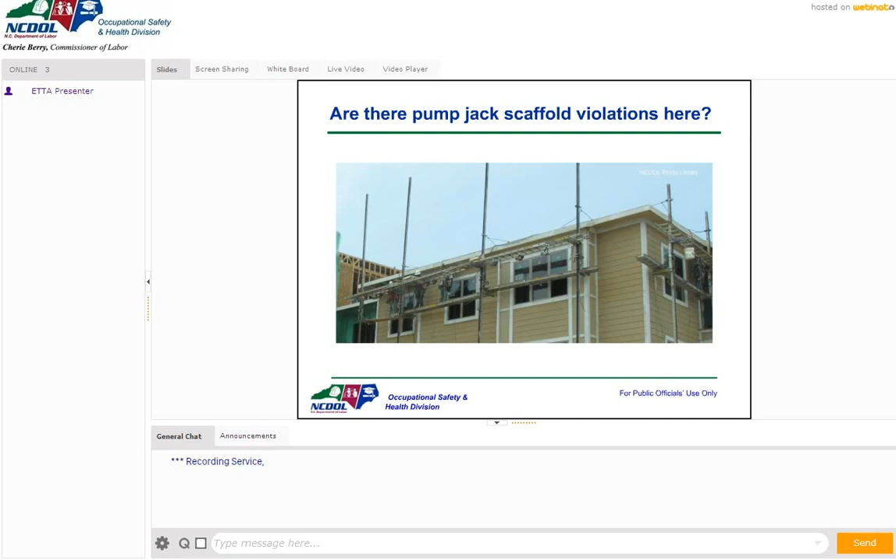Now here's the ladder jack again. So again, not what I would like to be working from, but again, here are the specs for ladder jacks. If you use them, you can go back to the standard 1926.452K and read all the requirements for ladder jack scaffolds.

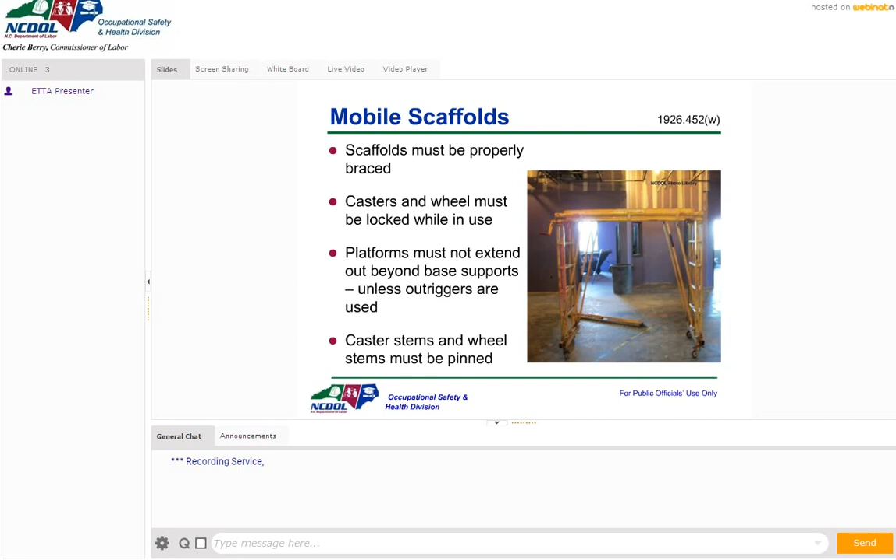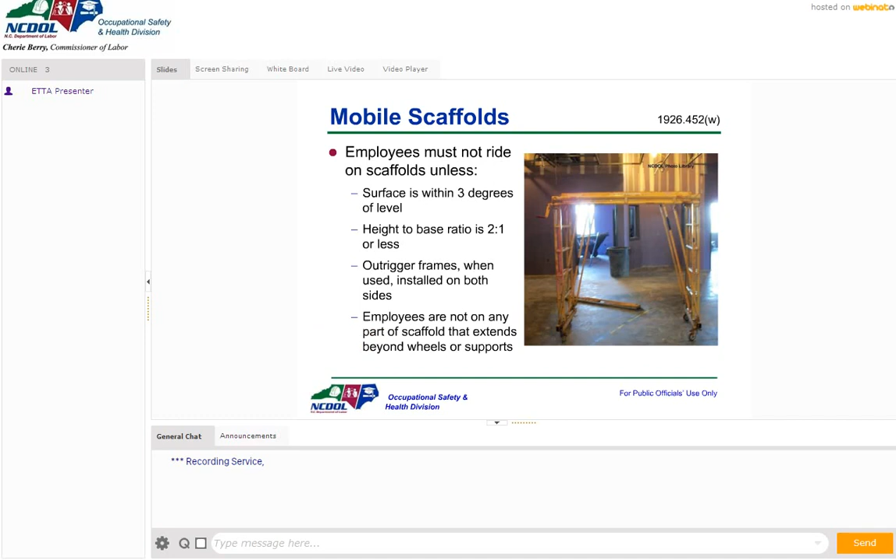Mobile scaffolds - now I'm sure a lot of you have these. They have to have locking wheels, and we're not going to roll people around when they're on these. And we have to be concerned about the safety of the worker up there. Employees are not to be on any part of scaffold that extends beyond wheels. Again, specifications here.

Now, then we're going to get into mobile scaffolds. Now this is a special type of mobile scaffold here. Now this is not the type that I'm thinking of. What kind of mobile scaffold do we probably see more than anything? Mobile scaffold. What type of mobile scaffold do we see a lot?

Scissors lift is what I'm looking for. Now, boom lift is a good answer, but actually a boom lift is what we call an aerial lift. A scissors lift is considered to be a mobile scaffold. That's exactly right, Eric, it is a mobile scaffold. Now, this is not a scissors lift, but...

Let's talk about scissors lifts for a second. Now, what we're looking at in this picture is not a scissors lift, but by OSHA, are people that work off of scissors lifts required to wear a personal fall arrest system? Required by OSHA.

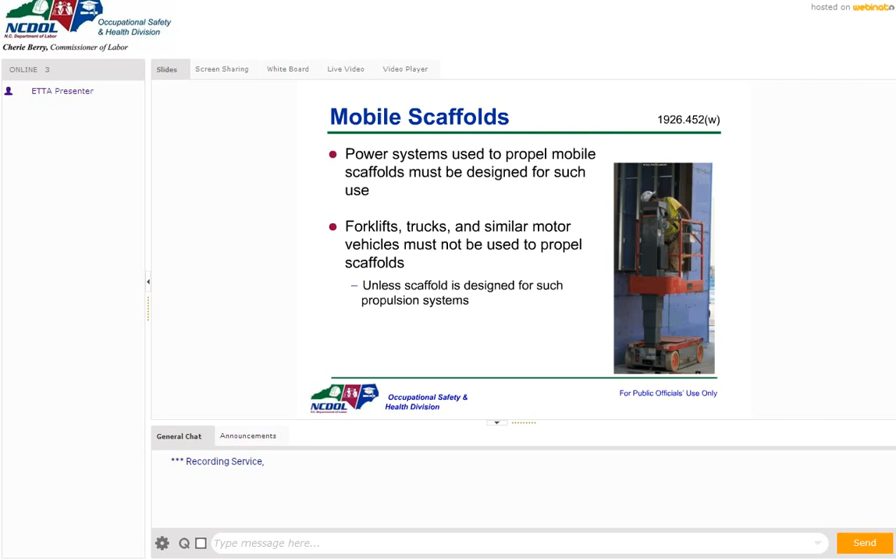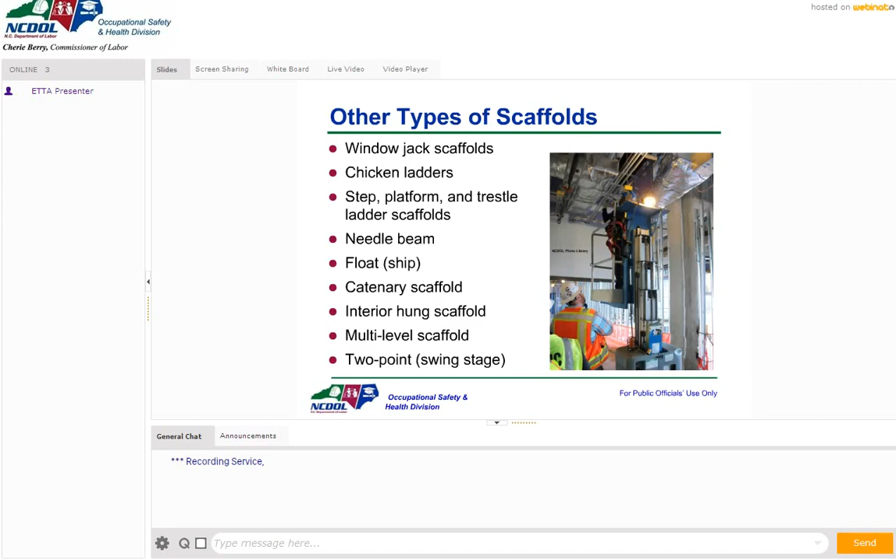Now, I showed you bunches of pictures a minute ago to give you an idea of what all these scaffolds look like - they're all called scaffolds. Aerial lifts, again, we've talked about them.

Now, one thing we do see sometimes is somebody - what do compliance officers see people doing wrong? Let's say the person's tied up, they're connected. But what do we see people doing wrong on an aerial lift besides being connected? Outside the bucket, what if it has rails? Standing on the guardrails, that's right. Climbing on the rails, accessing another level by climbing out of the bucket or over the guardrails.

Could there ever be a safe way to do that? Ever be a safe way? Let's say you got a platform and you're trying to get out of there - could there ever be a safe way to do that where there would be no hazard? Okay, rested on a roof. What if your D-ring - what if you're connected in the lift and you had another clip, and you were able to access another anchor outside that was above that would support? If I'm connected and I don't have any hazard of falling, then there wouldn't be a hazard.

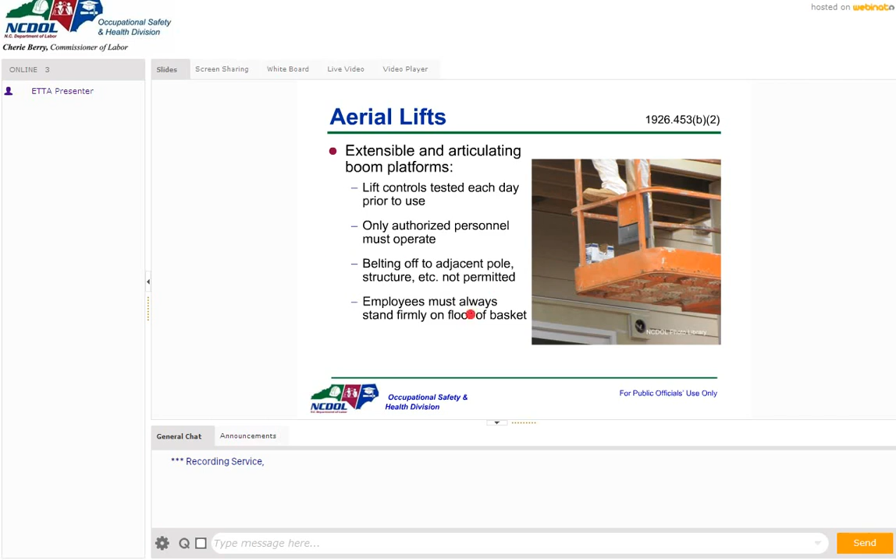And here we go, here's a picture right here. Like I said, people do that. Authorized people to operate have to be trained. Employees must always stand firmly on the floor of the basket or the bucket, whatever it is. Aerial lift brakes must be set. Don't exceed the limits. Don't move it when in working position.

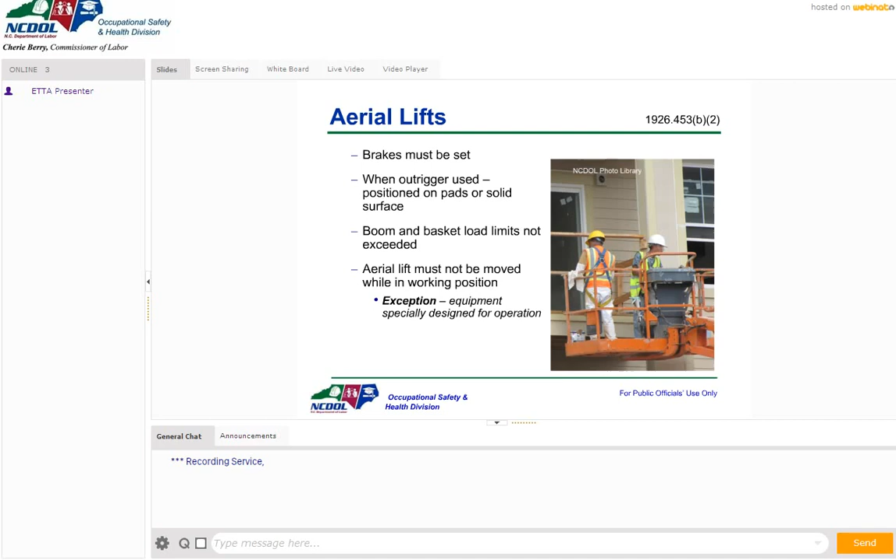Now, if you're driving an aerial lift on a construction site and you're not connected, is it possible for that person to be bounced out of that lift? Bounced out if they're not connected? Yes, of course - that's happened, and actually that can happen pretty easily. You are all correct.

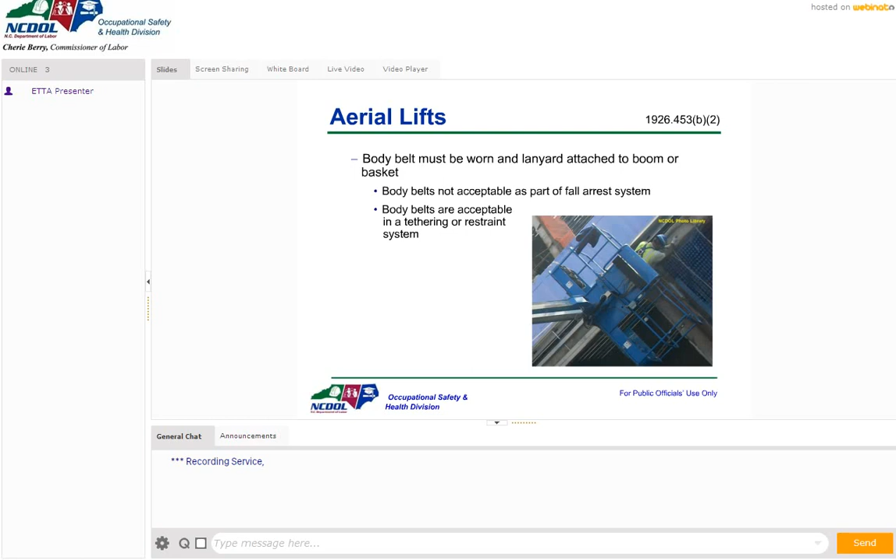Okay, body belt. Now here's the thing about body belts. Body belts can never be used as fall protection because if there's a possibility of an actual fall, a body belt can cut you in half. But if you have a positioning system that will not allow you to go over an edge or over a rail, you can use body belts for positioning. So body belts are never used for fall protection anymore, but they can be used for positioning only.

Okay, here we got the scissors lift. I couldn't remember if we had that picture in here. Scissors lifts are not aerial lifts. They have their own little section, and they meet the definition of a scaffold, and they must comply with the requirements of a mobile scaffold. So again, we got the scissors lift here. We see those all the time.

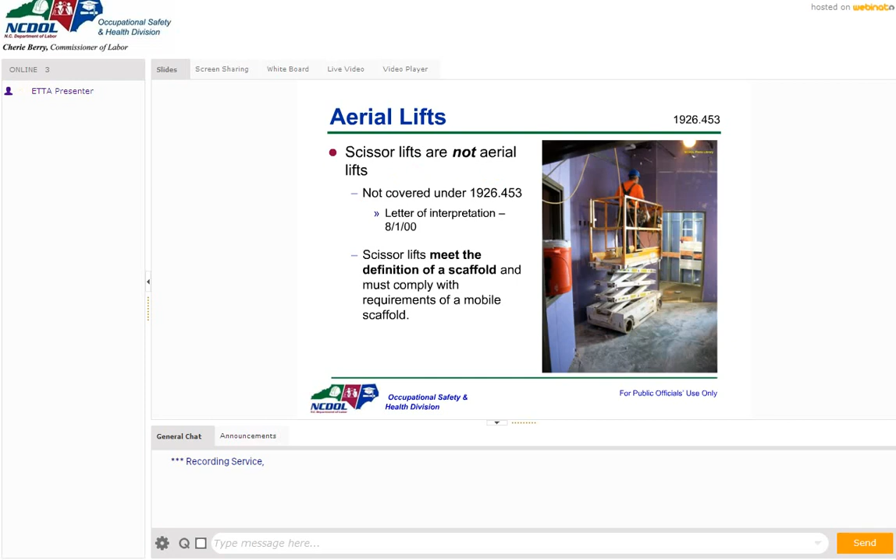So let's say we have to train people to work on a scaffold. Whoever trains must be qualified. You're going to talk about the nature of fall and falling object hazards, working around electrical lines, erecting protection systems from falling objects, and load capacities. So you're going to pretty much cover all this when you train somebody.

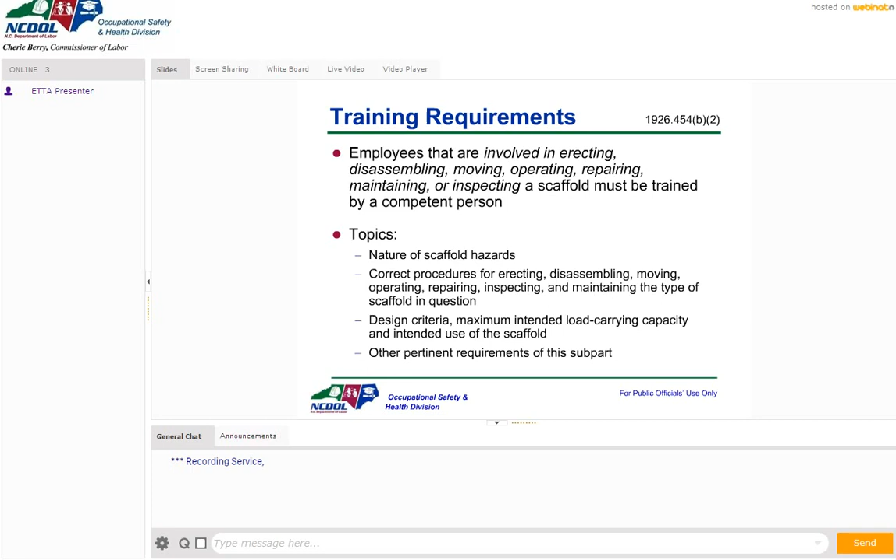Now your competent person, the people that are building the scaffold system if it's something that needs to be built, the competent person is the one responsible for that training, because the competent person has the authority to say this is not right, we can't use this, scaffold must be taken out of service, or you're not using the scaffold right. So your competent person has the authority from the company to stop work, stop erection, not approve something for use.

Retraining: if you see somebody is doing something wrong, they need to be retrained. So if they're climbing the cross brace instead of the ladder, things change on the work site, you might need to retrain them, or you put them on a different type of scaffold. Or you see somebody's being trained, but they're just not doing the right thing, they don't get it. Anytime you have training, make sure that the employee assures that they understand everything they need to know and do.

That's why we have training forms. We have the employees sign. Companies I've worked for in the past, a lot of them, we would have statements at the bottom: my signature on this training document means that I understand what was covered in this session. And we would tell the employee, if you've been trained and you don't understand what we taught you, then we're not going to let you do whatever it is. We want you to understand it.

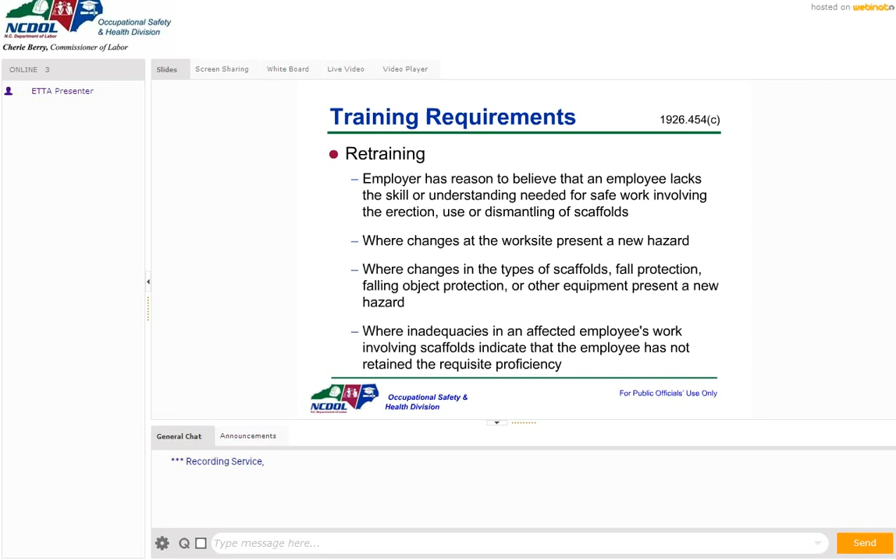So today we went through a bunch of slides and talked about minimum requirements, design, setup, and use, hazard ID, and abatement methods for scaffolds.